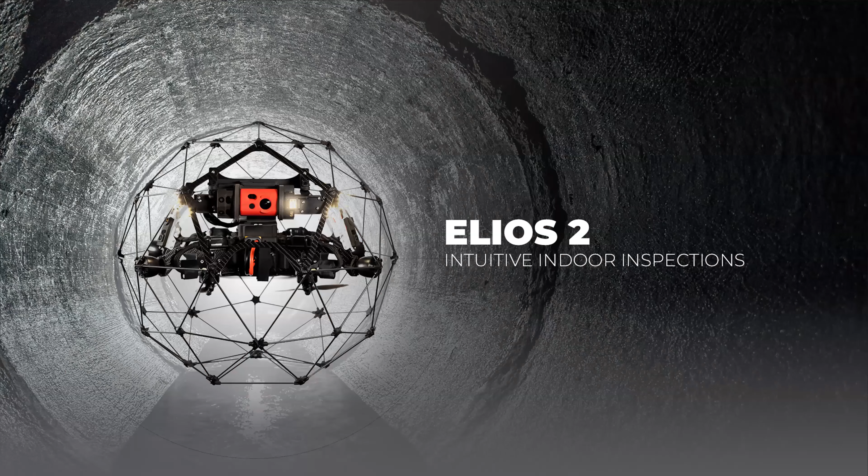So today we are showcasing the best in confined space drones. This is the Flyability Elios 2. Many of you will be aware of the look of the system - a very impressive little platform, very unique. Here are some images of the Elios 2 in action.

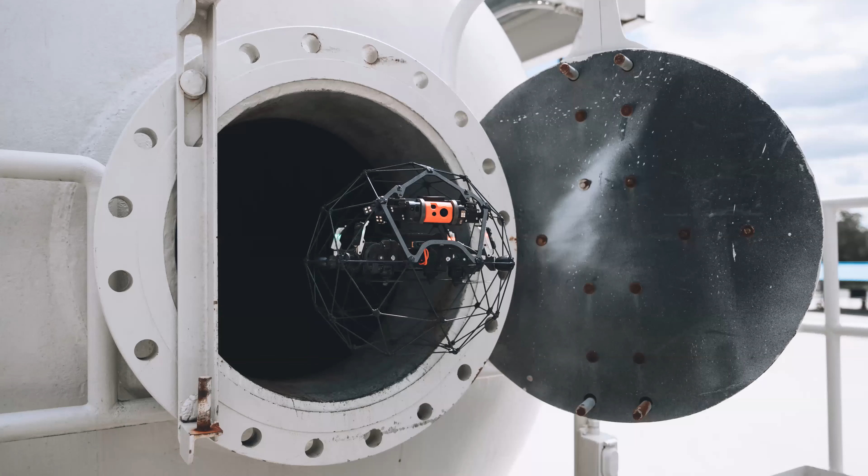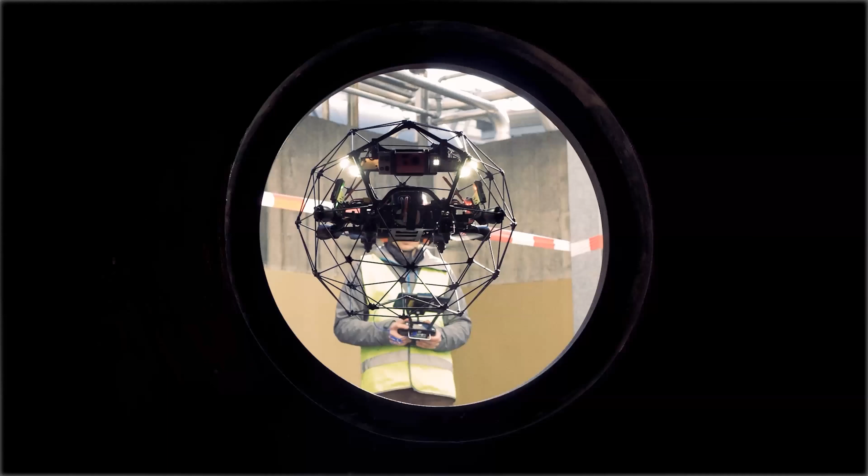So here you see it entering a tank, which would provide inspection companies with a multitude of headaches traditionally. That's no longer a problem when using a cage drone. Why is this an important example? Well, for planning and inspections, it takes up the vast majority of the workforce's time and delivery.

If you want to inspect the tank, what are you going to do? Well, you potentially have to have scaffolding, you may need staffing, you may need to plan personal protective equipment. There's time constraints as well - how many do you need for that workforce? What are the dangers involved? It's a lot to plan and process.

And the Elios 2 removes a lot of that planning. So you fly a drone in there - there's no risk, there's no cost deficiencies, there's no time taken. It's a lot more effective and efficient.

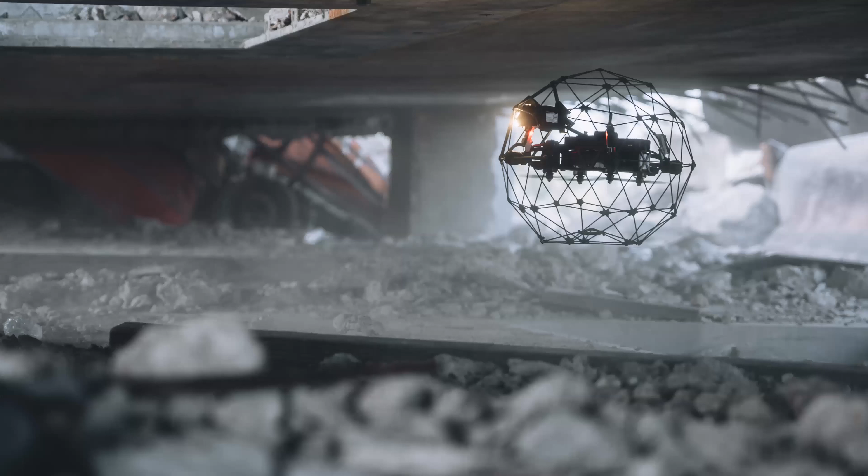It's another great example of the Elios 2 in confined spaces. It shows you that the cage is going to give you ultimate protection, but not just for the drone, but also for the surrounding infrastructure. So you don't need to worry about the propellers damaging anything because the cage is going to protect it. It's quite a safe platform to use inside these environments.

This is a great picture. This shows the luminosity of the Elios 2. You can see it working well indoors, almost as if you were using it outdoors in traditional daylight. This aircraft is a leader internally, and you'll see why going forward.

So who is Flyability? You might be asking that. Well, they are the leaders in indoor drone products. To expand on this, they're revolutionizing use cases for drones in confined spaces across a multitude of industries. They're based in Switzerland, which is a hotbed for drone technology, and they've led a successful team built by experts helping deliver innovation and new drone technology.

So they've got a great working relationship with not just FEDS, but also with Pix4D, which is a great software platform. That partnership provides a complete solution - you want to use the drone, you want to take the footage, you want to process that footage. I'll go into a bit more detail later on.

So of course FEDS stands for Falcon Eye Drones. We're the leaders in specialist drone services and solutions in the Middle East. We're ranked 7th in the world for survey inspections, according to Drone II, an independent research company. That information is on their website.

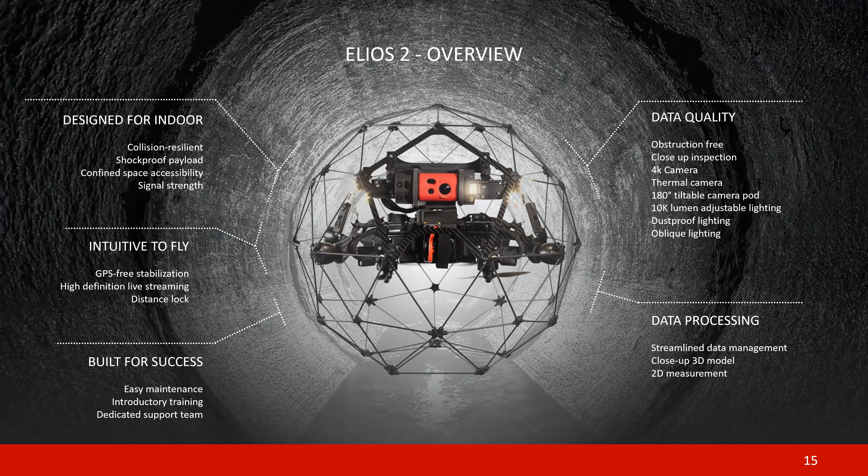I skipped some of these slides before, apologies for that. So this is the spherical cage design the Elios 2 offers. It has 360-degree collision avoidance and a smart propulsion system.

And here's a clever thing: if you impact an object and it starts to rotate, the computer on board will automatically detect that and correct itself. So even if you're a bad pilot, even if you're in a situation out of your control, the drone will correct itself - be confident knowing it will work on top of the capabilities of your pilot.

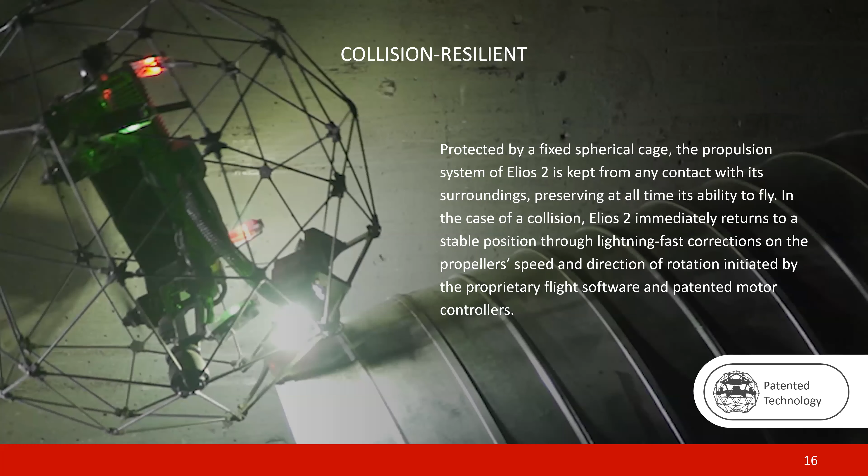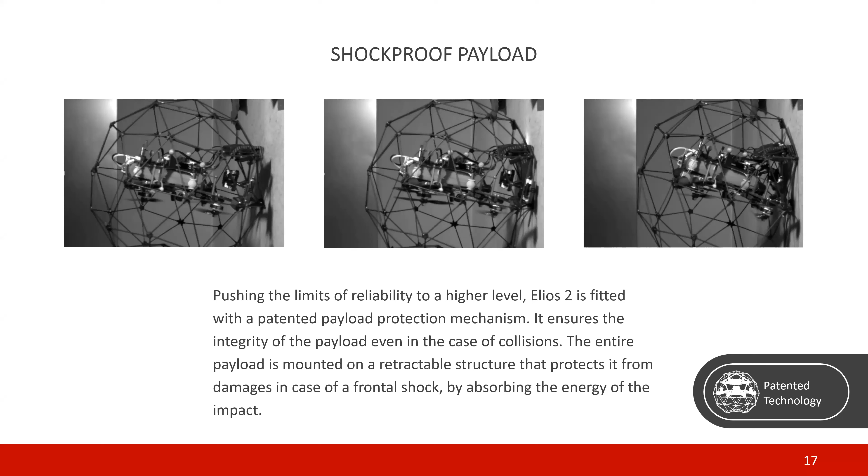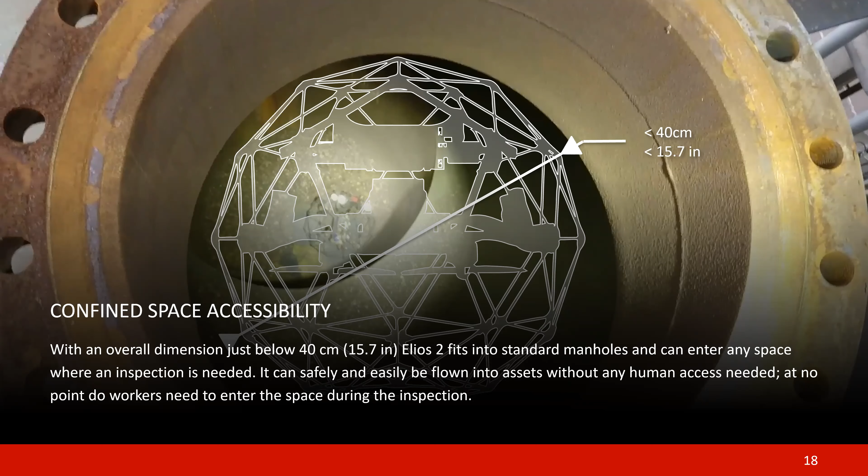Typical municipal culverts, sewers, piping, or potentially tank openings all have small openings. This image shows the Elios 2 is quite small in diameter, 40 centimeters, 15.7 inches. This allows it to navigate these environments, which is ideal, because that would usually be a nightmare for any human. You have to worry about the safety of the workers, the time it would take to get them through, or what happens if they don't even fit through. Well, this system allows you to speed that process up tenfold, and that's ultimately going to save you time and money.

Inspections can be done beyond visual line of sight. This allows a pilot more scope for work. Traditionally, outdoor regulations and restrictions prevent those efficiencies. The great thing is, because this is indoors, there aren't those restrictions legislatively.

The Elios 2 uses Lightbridge transmission technology. This sends a strong signal that works through walls and containers, giving you pilot control at all times. Here are some visual examples of situations in which this drone, the Elios 2, will work well, because traditionally you would struggle with the transmission.

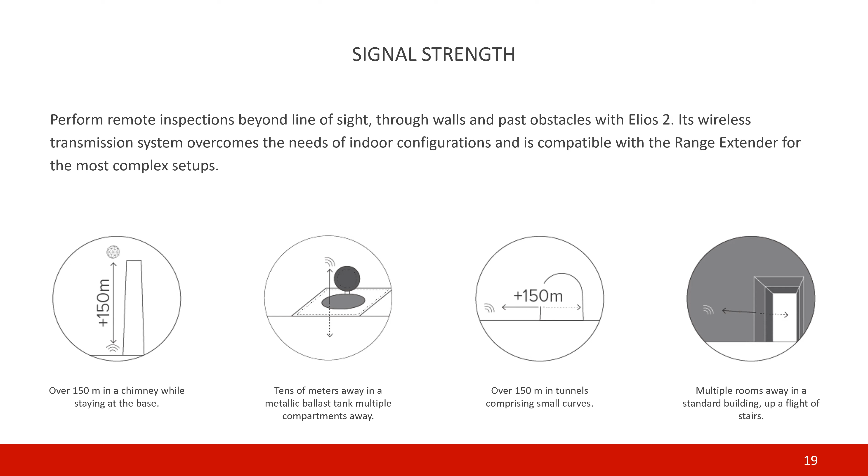It is compatible with a range extender, and this is quite a handy little device. I can talk about prices if you're interested after this webinar.

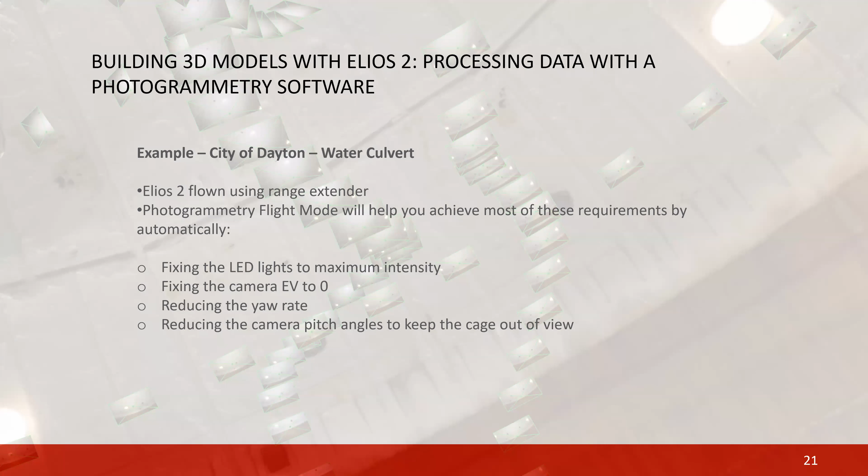This is the next image. I'm going to show you an example in the City of Dayton. It's a water culvert, so albeit not a direct representation of something in the UAE, this gives you an idea of the images and the capability of the system. The settings that were on the aircraft you can see in front of you here.

Why would you want to use it for indoor photogrammetry? You can organize your data, make accurate measurements, check structural strength and shape, and track any changes since your last inspection. So you may want to do this over 1 month, 3 months, 6 or 12, taking the drone through each time and seeing the changes through that time.

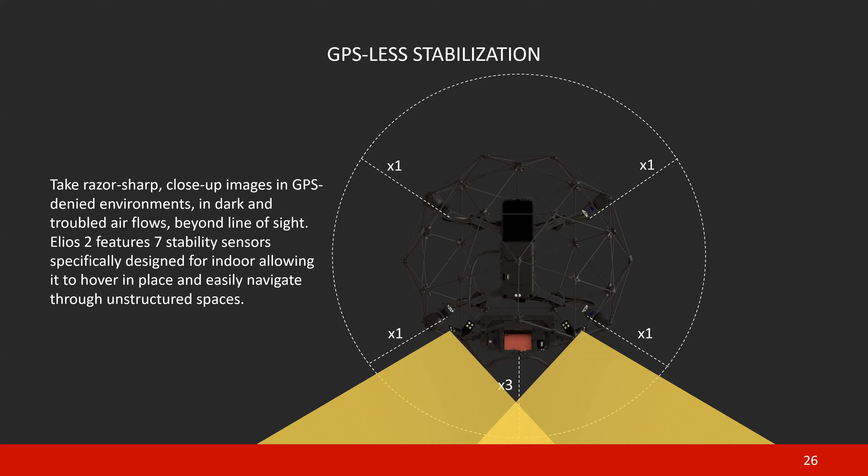This is ideal if you're flying in an area which suffers from turbulent airflow. I know that some tanks and culverts suffer from airflow, throughput of air, and it causes a lot of turbulence in areas devoid of natural light, so it can be quite disorientating. Because of these sensors, the drone will detect its position and hold its position, giving the pilot 100% confidence despite these environmental changes and challenges.

On the left here, you can see you can use these sensors to actually create a distance lock with a wall or an object you're inspecting. Going back to my comment, if you want to inspect over a prolonged period of time - 1 month, 3 months, 6 or 12 - use the same distance lock on that same object to see if there are any changes over a prolonged period of time. Now you can change this from 30 centimeters through to 200 centimeters, but this will allow you to prevent collisions deliberately if you want to use it merely as an inspection platform without having to worry about impacting.

So multiple layers of redundancy. Fantastic.

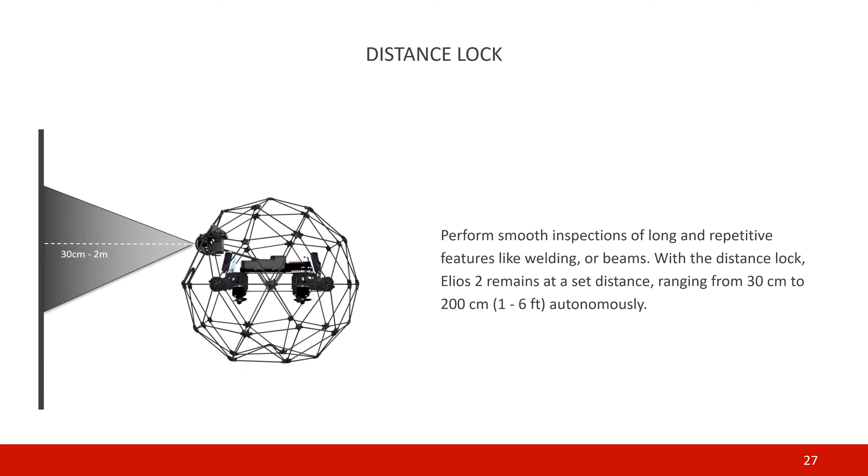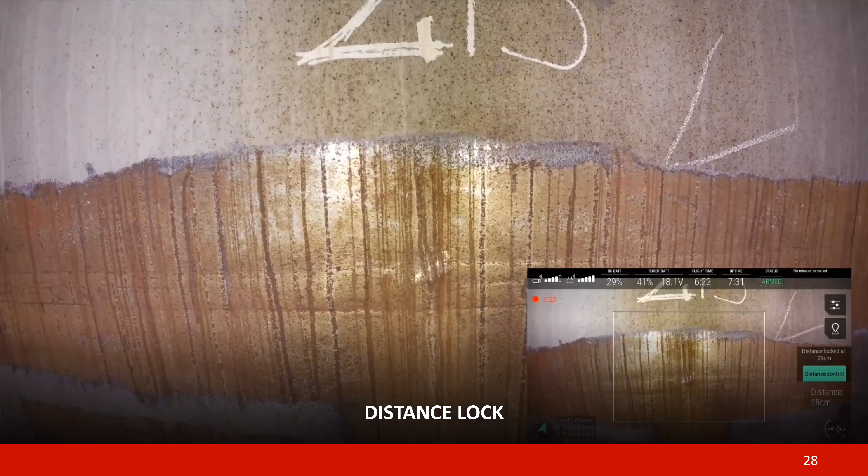On the screen here, you can see how this is illustrated. You get a total sense of control. This is your distance lock activated, and it's keeping its distance at all time. Now the pilot can be pushing forward on that stick - it's not going any closer to the object.

Live streaming to the tablet is included. The drone comes with a tablet, it comes with a remote control. It's essential - you can see the footage that has been captured in full HD, and it's streamed using that Lightbridge transmission system I mentioned. So very high quality, very low latency.

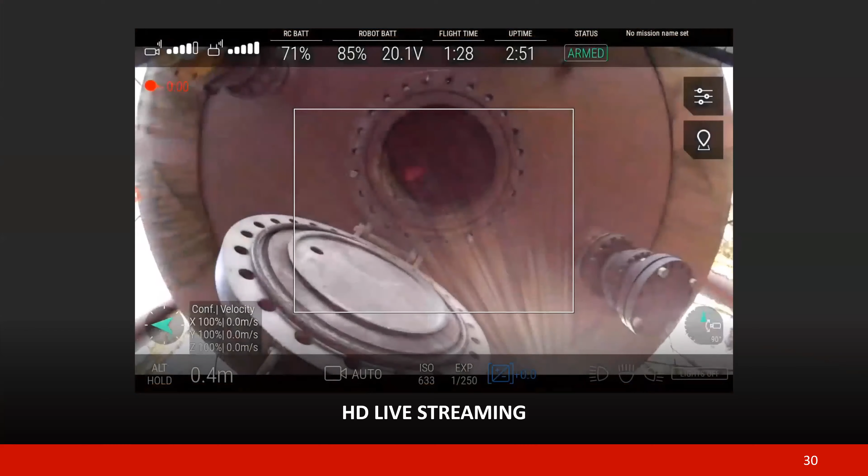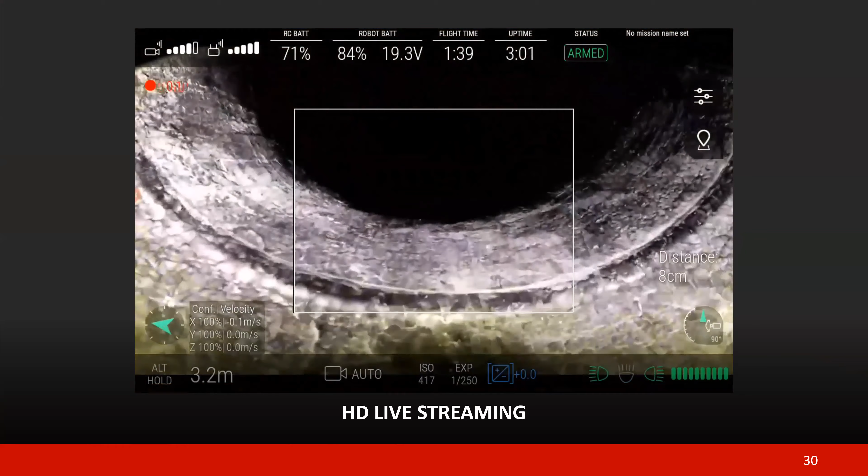This gives you an idea of some of the footage. Apologies if this is jerky - this is the age we're in at the moment, everyone's using the internet, so I do apologise. But you can see here, all the data is on screen. You have your transmission strength, your battery levels, your altitude, even your camera settings. Everything's on the screen. It's high definition as well, which is great. So all the tools you need to operate this drone effectively.

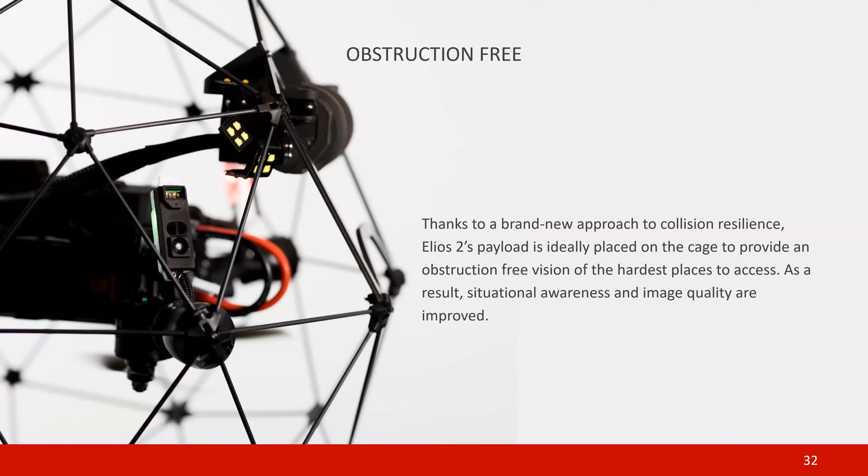The data quality on the drone is captured through the following reasons. The Elios 2 utilizes a clever cage design, and it's making any obstructions free from the camera. Notice on this image, that black bar at the top is the camera module, and it sits proud of the cage. This is ideal if you're going to want to take shots, and even though you're using a cage drone, it's not in the picture, which is fantastic. So this provides you accurate data sets without having the cumbersome nature of the cage. That was there on the Elios 1, and they noticed that and they improved it in the Elios 2 now. It's cage free on your images, which is brilliant.

It's got a 4K camera and it's capable of 12 megapixel stills. You'll be confident in knowing that when you are taking footage and you're utilizing this data, you're not compromising on the quality of the camera.

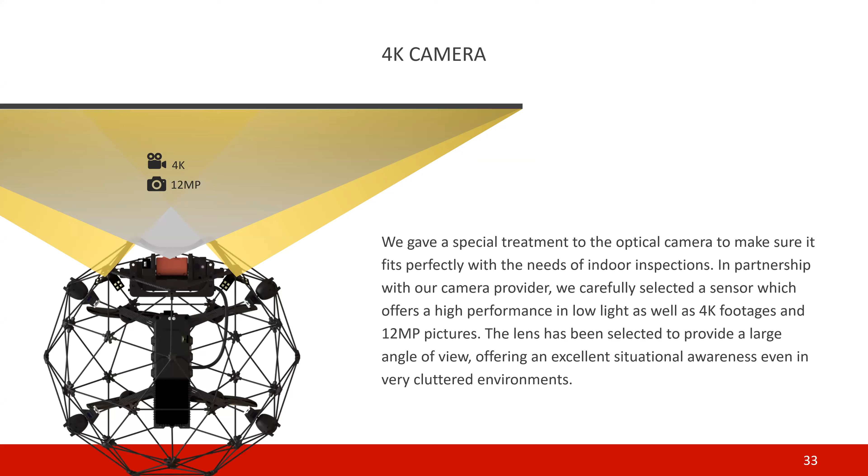It uses a small lepton thermal camera. Why has it got this on, you may ask? Well, it's great because now you can detect not just the stills for data sets and for inspection work, but you can also detect data for leaks, human or animal presence, maybe in containers or wherever you may be searching indoors. Hidden defects traditionally impossible to detect with normal cameras can be detected with this. So if there are any thermal residues or leaks, then the thermal camera will pick them up very easily indoors.

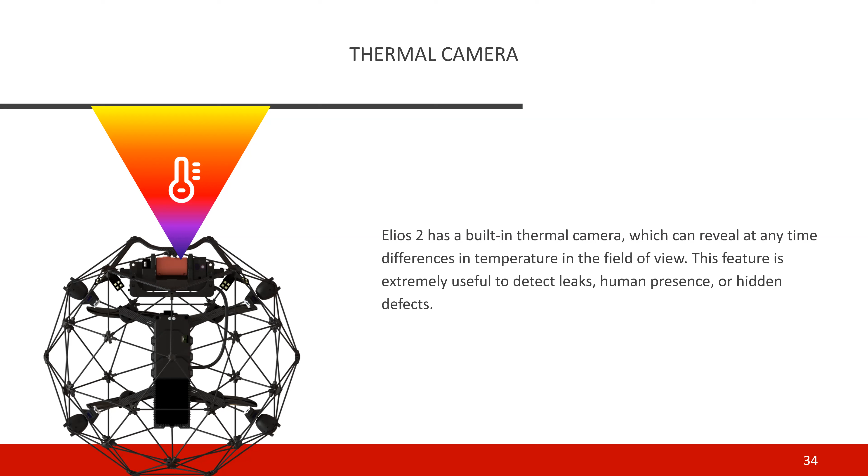The module of the camera, that bar I mentioned before, you can tilt it 90 degrees up, and you can also tilt it, I think up to 90 degrees or 30 degrees down as well. So there's a lot of freedom of movement there. And why would this be important? Well, you could be in a situation where you're flying the drone in a very confined space. You want to look at the object above you - you can't rotate the drone, you can't move it up. Why not move the camera instead? It gives you even more flexibility when you're flying in confined spaces.

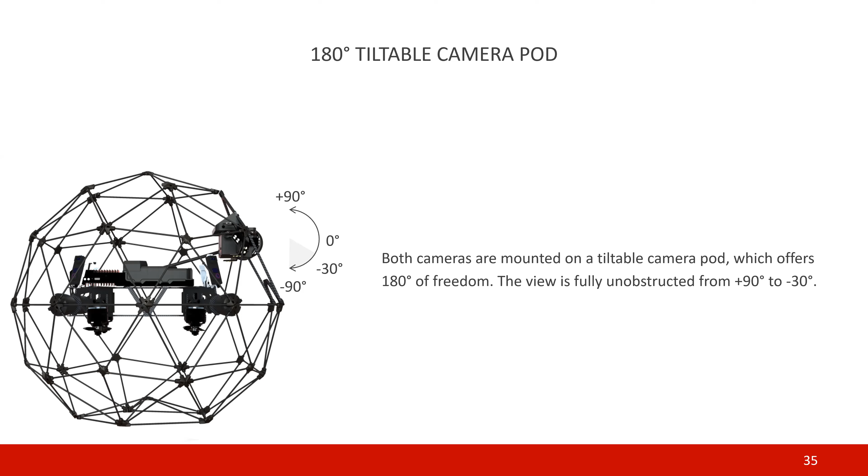So those sensors that I've been talking quite a bit about, there are a multitude of two different types. You've got optic and you've also got the laser sensors as well. So they are used in combination. They provide you the very best in safer flight for indoors, prevent collisions, and that data set is consistent as well. And there are multiple sensors too, so more redundancy.

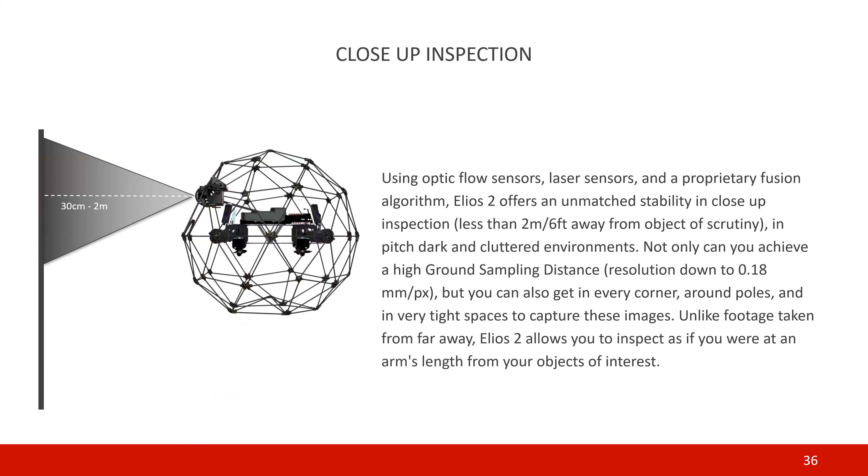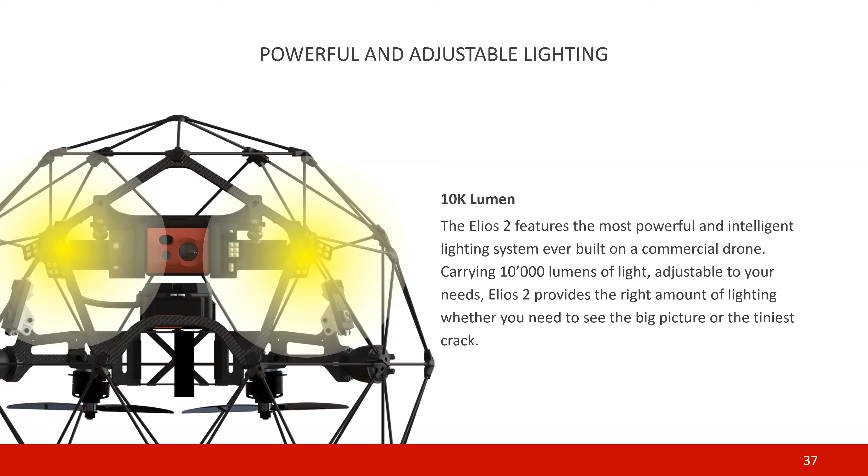This drone's got the brightest lighting system of any drone out there on the market today. It's 10,000 lumens, so 10K lumen lighting, and it provides near daylight intensity. So if you're flying indoors, you don't need to take a light, you don't need extra equipment - this system does it all in one go. So no natural light, no problem. You can see the tiniest cracks or issues, and these lights are very powerful, so much so, as I say, it's like using it in daylight. There's more advantages to this than you may think. How would that be?

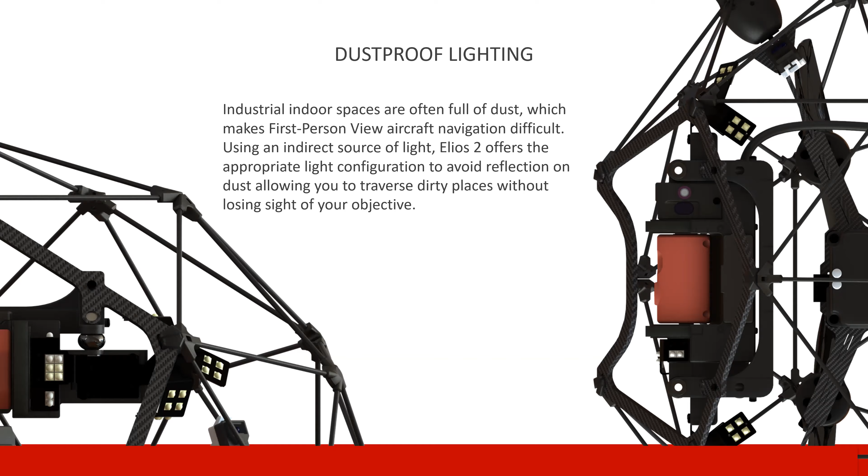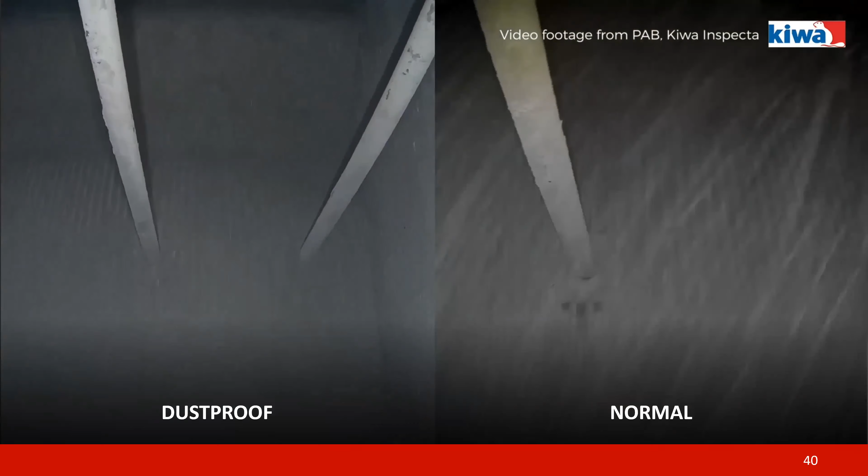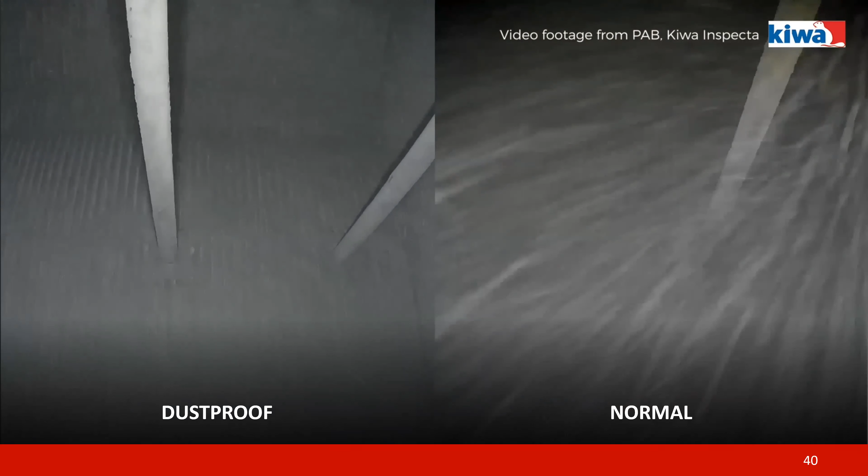You may think, well, if you're using it inside a container, what about dust? What about debris? Well, the Elios 2 avoids this, and it uses a clever lighting system. You can see on the left here, using that clever lighting system, it avoids any artifacting, dust or debris. On the right, this is your normal lighting. So if you didn't have that extra oblique lighting on the system, you wouldn't see anything but dust and debris. Very clever, and it's been designed with this issue in mind.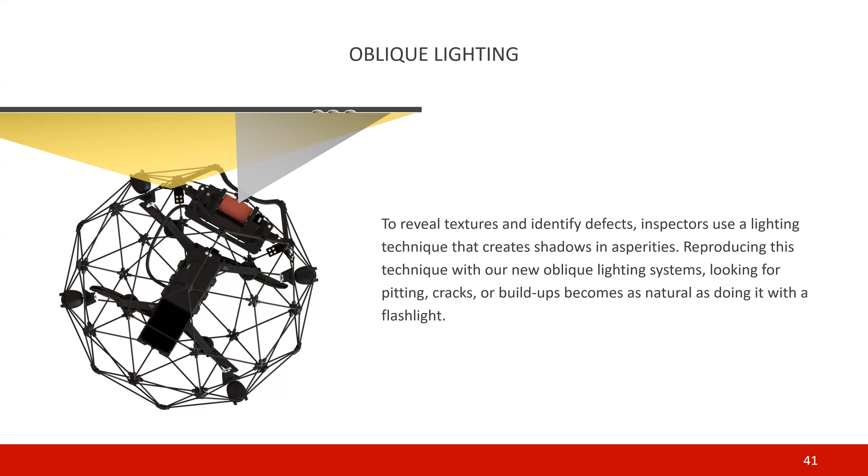Another string to it, though, that oblique lighting. Why is this unique? Well, it offers a new feature for the Elios 2. In the past, if you were to shoot directly on an object, you'll only see the surface. You won't see the shadows cast on the damage to any surface or object.

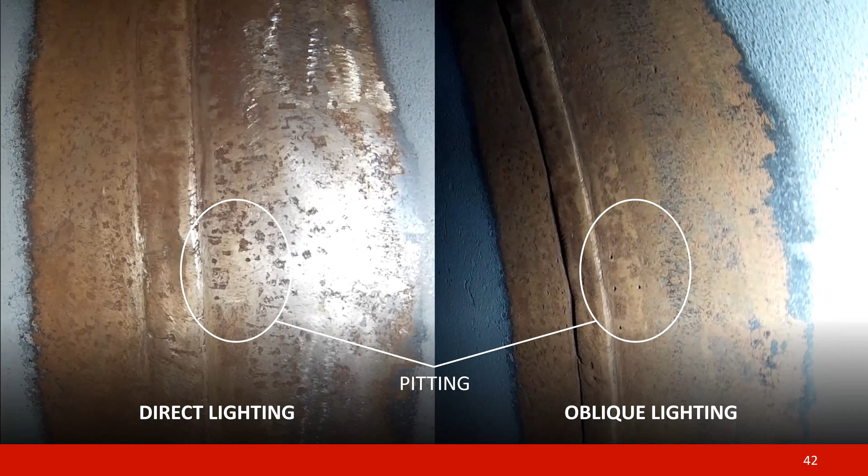So in front of you here, you see on the left, direct lighting. Very good, you can see the internal and inspect the internals of this tank. On the right, though, you do see there is scoring or pitting. So this allows you more data to then make serious decisions on whether you need to make surface amendments or repairs on this tank inside. This is another string to the bow on the Elios 2. You can see why it's quite a valuable inspection tool, especially for data processing.

So what is this process of data? What can we showcase on top of this? Well, it has an inbuilt cockpit software platform. This is downloadable onto the tablet, and should already be installed when you purchase the drone and receive it.

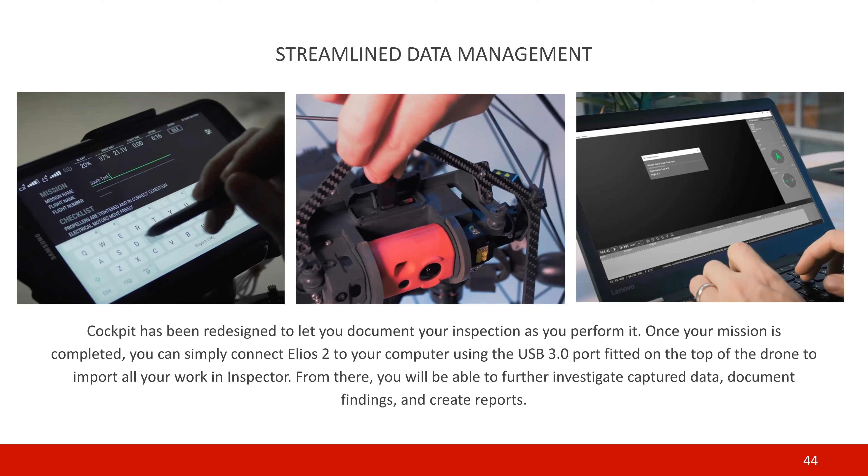Now, this features a lot of data sets, so you can check your telemetry when you're flying. You can also see your service maintenance report if you go into the software on the drone. There's a software update recently launched, and the great news is if you want to know when you need to maintain or manage this drone, it will tell you on screen. You can capture videos, you can report as well. So if you want to create a report based on the footage, you can use that software for it.

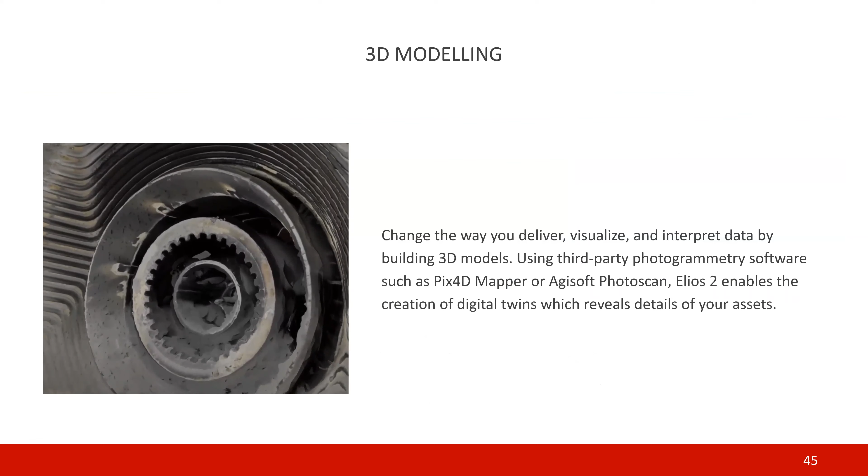You can use the drone for 3D modeling. You can take the footage, drag and drop it into Pix4D software, which we sell as well, and capture that data set and allow you to post-process or show it to the board or to your management team. You can give a real-time indicator of that footage you took on board the aircraft and move around it.

For 2D measurements, we did talk about photogrammetry capability, but why is this important? Those culverts I showed you before, well, if you want to make repairs, you can't get humans down in there because it's not cost effective. Put the drone in there. You can measure that area using that 3D model. So it gives you an accurate indication of the surface area in which you want to repair or replace items, brick, concrete, whatever it may be. This makes the system ideal for that assessment.

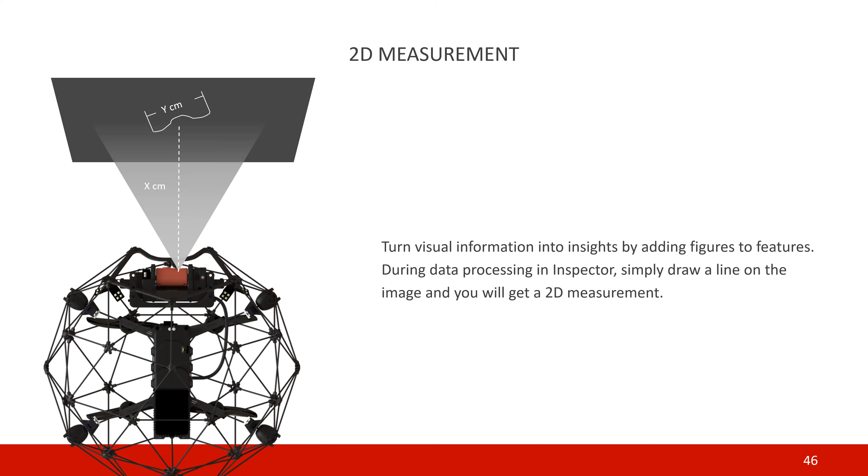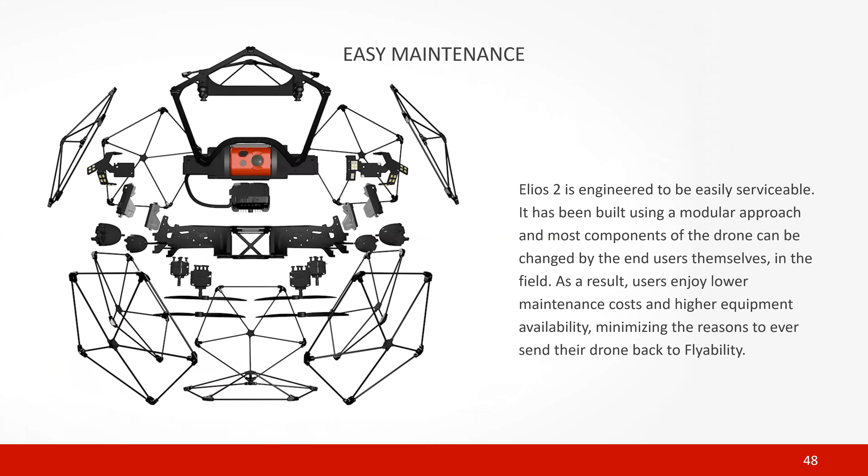And going further into it, it is built for success. It's got a modular design and it can be maintained with ease. We offer the pentagons, you get 5 extra segments for every purchase, and this is great because we can help train your team and you can repair these on site. It means you get less downtime, means you're up and using it more often, and you're not worried about sending it back to the manufacturer or to Falcon Eye Drones for repairs. You're out in the field longer.

Training is included in your package and it's essential. It's very well and easy to understand how to fly the drone. That's half the battle, it is very easy to use. However, the hardest part about any data set is how do you manage that data? With our expertise and experience, we can help your team understand, okay, let's take footage of 100 bolts inside a warehouse. You're flying that drone and over the course of a day, you fly for a few hours. How do you assess the damaged bolts based on all that footage you've taken? There needs to be a process in place, and we can help with that.

There are a lot of benefits for the Elios 2.

The main points to prove are: it will improve your safety, it will remove the need to build scaffolding, and it will remove the need to invest in PPE for workers.

It's going to reduce your administrative costs. You don't need to spend as much time setting up for inspection, and you also need fewer controls.

You need a pilot, you need a drone. You don't need a team, you don't need scaffolding, you don't need a risk assessment, you don't need administration.

You're going to reduce your downtime and carry out inspections within hours, not days. Take the drone in, fly into the asset, take several batteries, and you're done within a few hours.

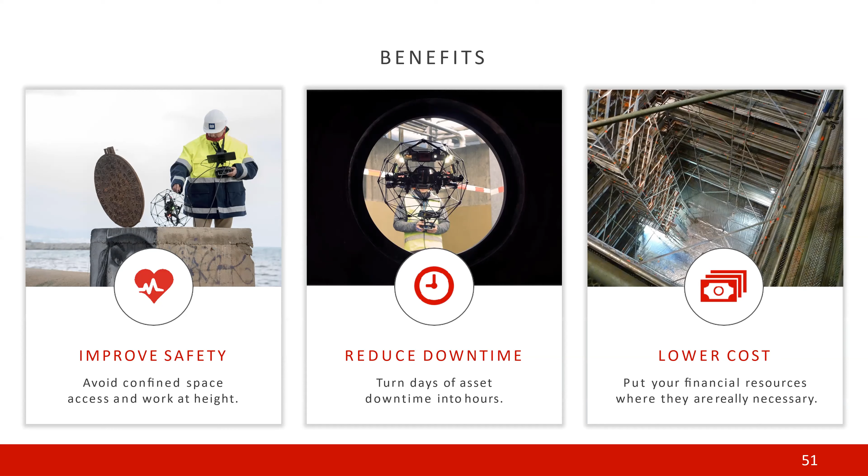How long would it take you to implement that with a team and scaffolding? This really is a win-win solution for inspection. It's going to lower your costs and save you money.

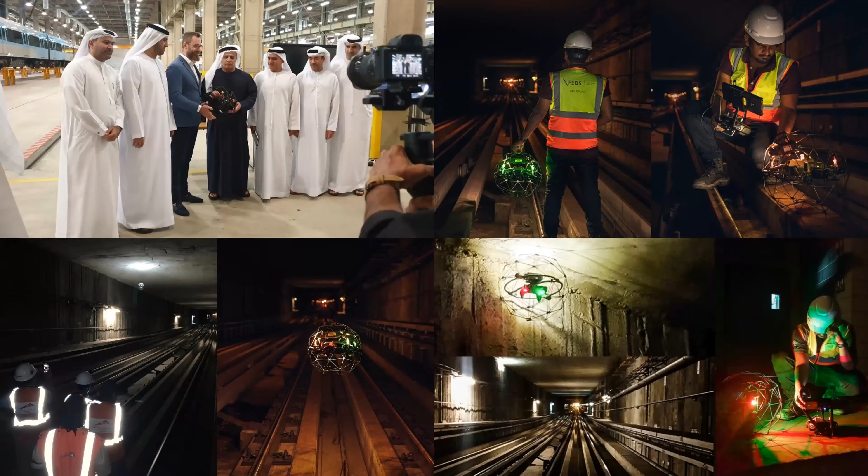However, we did prove the use case of the Elios system indoors in confined spaces, using it in the Dubai Metro tunnel system. They were very pleased with the system and happy with how it can save money and speed up the process of checking for damage, without needing to shut down the system longer than necessary or construct scaffolding to get the team up to the roof and surfaces. A very cost-effective solution for them.

The batteries last about 10 minutes, and I know a lot of you may be concerned with that flight time, but you can't compare it to drones outside—you've got to look at it this way. You can use several batteries, they're cost effective. 10 minutes is a long time when conducting internal inspections, but the time saving and cost effectiveness of this drone far outweighs that.

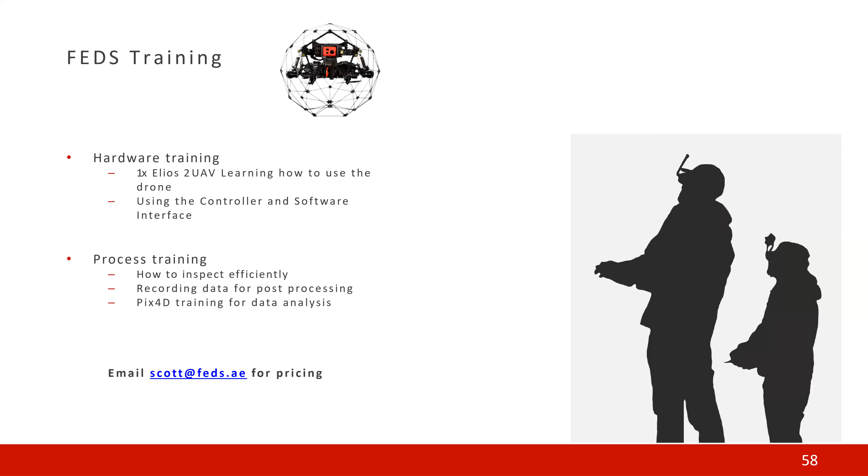Some of the software platforms it is compatible with—you've got Pix4D. These are some of the software versions of Pix4D, they are Flyability friendly. You can use Mapper, Survey, and Inspect. There is a cloud-based system as well, so if you want to transfer this and use the cloud to process that data and share it, we would always recommend having the annual subscription to Pix4D. It gives you that capability.